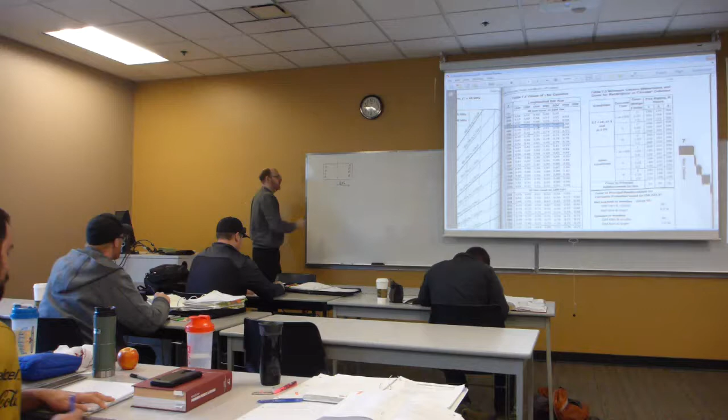We're just going to consider bars along here. The number of bars in this particular pattern does not matter. Now, what we've got here is that gamma h is the distance between bars, so from the neutral axis it's half gamma h.

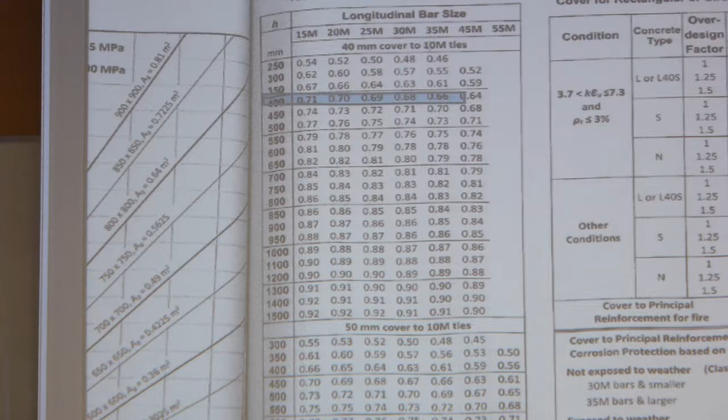This gamma value, we don't need to calculate. We actually have this table here, table 7.2, which allows us to figure out for a particular size column and a particular bar size what that value for gamma is. This takes into account the cover distance and the stirrups and automatically figures out what gamma is. The first one here is 40 millimeter cover with 10M ties, and then we also have 50 millimeter cover to 10M ties, tabled down here as well. So it's just a matter of looking up on the table what that value for gamma is for your particular configuration.

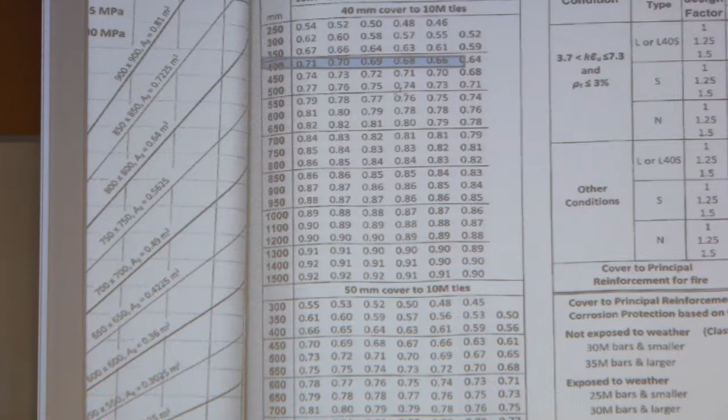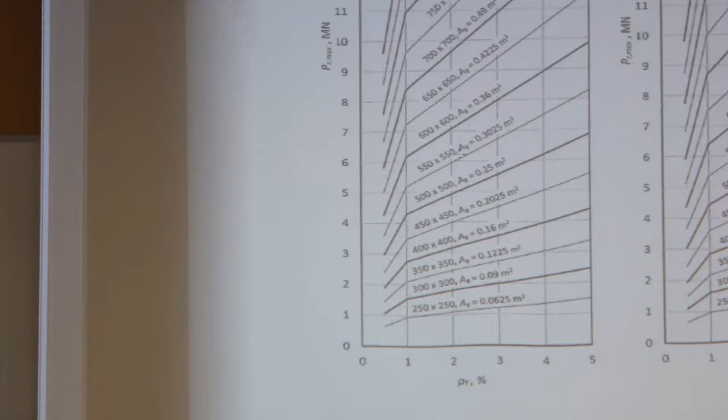So again, we start by coming up with our PF and setting that equal to PR, going back to this table and reading across and coming up with our first guess of our size. That first guess of that size, we can then go back down to this table and figure out what gamma is. We're going to guess what size reinforcing we're going to use, so I just pull gamma off of the table, and then we do all of our calculations based off of that.

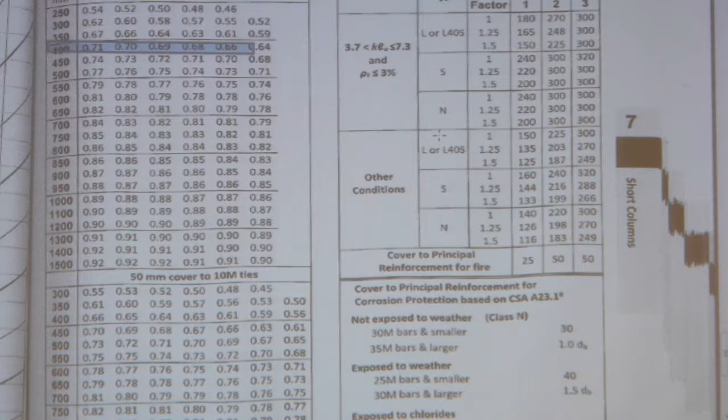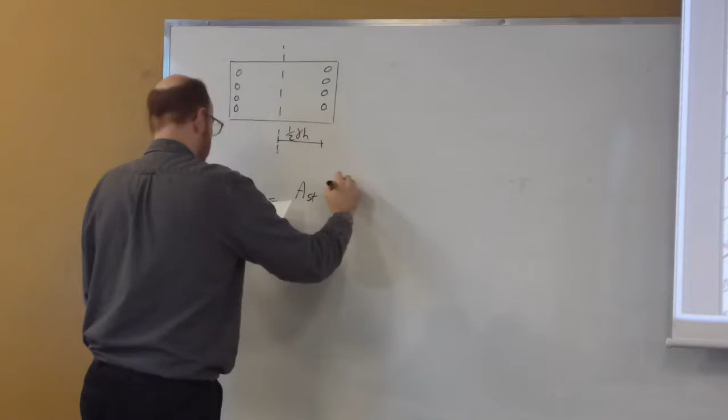So what we're going to do here is figure out the moment of inertia of the steel, and this is just going to be A times D squared. So on that one, H is 400? Yeah, so the tables are all done in terms of the generic value for H. So our I of our steel is A times D squared, so it's our area of our steel times gamma squared, H squared over 4 - that's our area times distance squared.

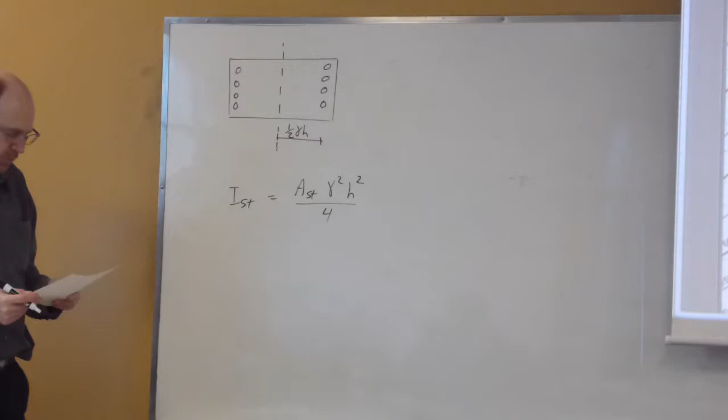Now, we don't necessarily know what size bars or how many bars we're putting in when we look at this formula. So what I'm going to do is relate this back to that reinforcing ratio, the rho value. So rho T is area of steel divided by BH. We looked at BD when we were talking about beams, but here we're looking at gross area for our columns - but again, it's just a reinforcing ratio. So if I plug that reinforcing ratio back in here, what we end up getting is rho T gamma squared BH cubed over 4.

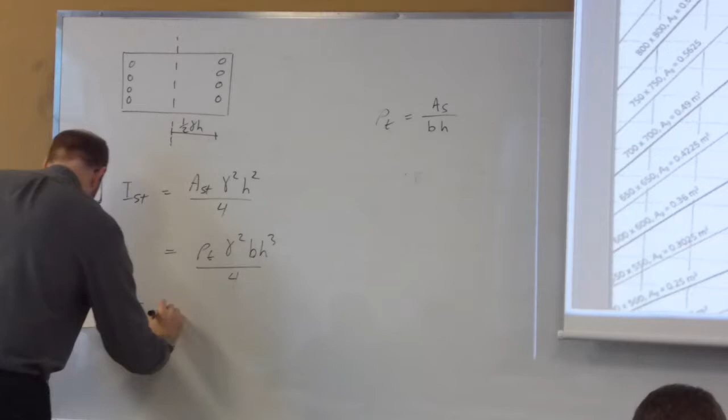And if I take this expression and substitute that back into our EI formula, I get 0.2 EC IG plus ES rho T gamma squared BH cubed over 4, all divided by 1 plus beta D.

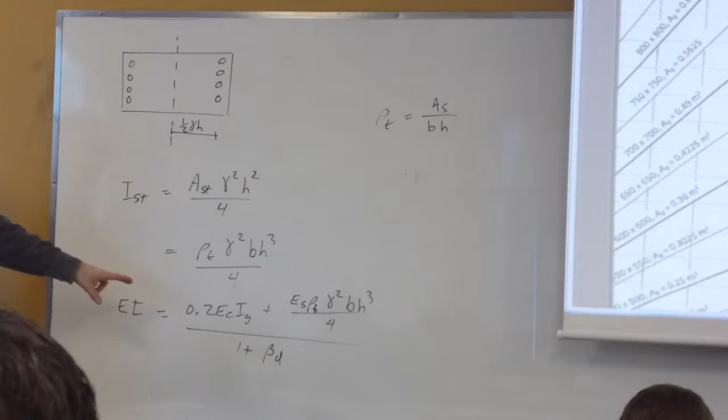Now, this formula - where does the 4 come from? Because it's 1/2 squared. Okay, so this formula is fairly complex, but you'll notice that I've got a BH cubed term out here, and IG, of course, is 1/12 BH cubed.

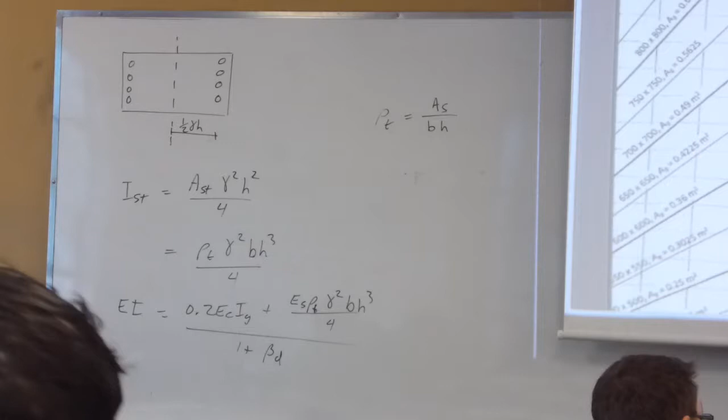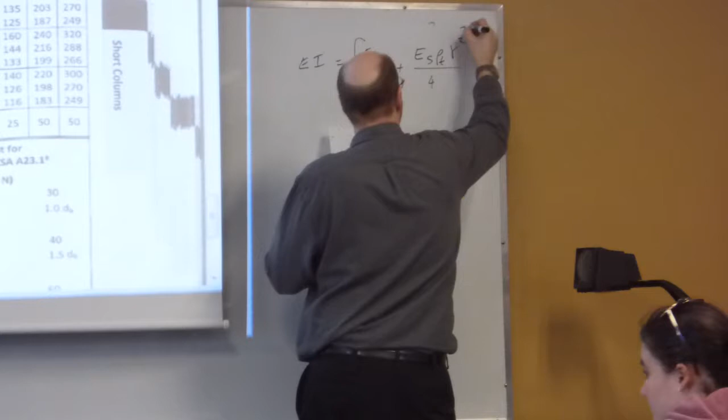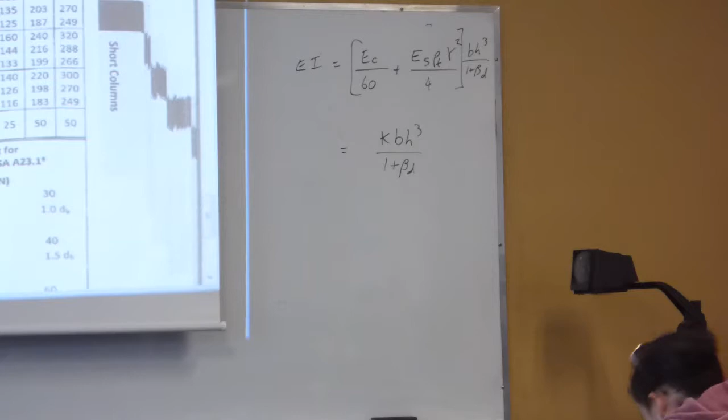So what we're going to do is rearrange that equation a little bit, and I'm going to factor out a part of it. So our EI is EC over 60 plus ES rho T gamma squared over 4, and this will be times BH cubed over 1 plus beta D. What we're going to do is take everything inside the square brackets and let it equal K, so this is equal to K times BH cubed over 1 plus beta D - all of this inside the square bracket.

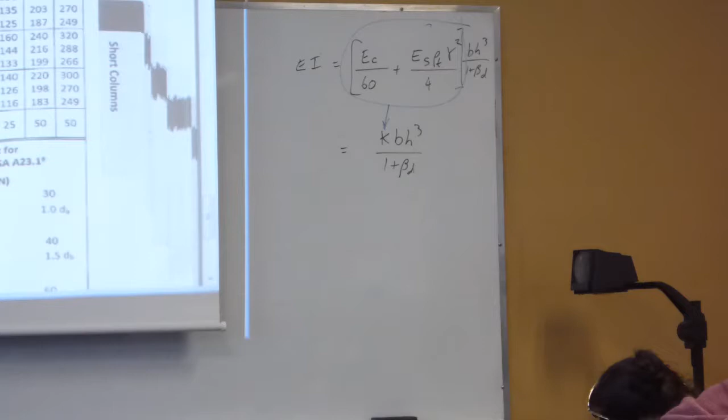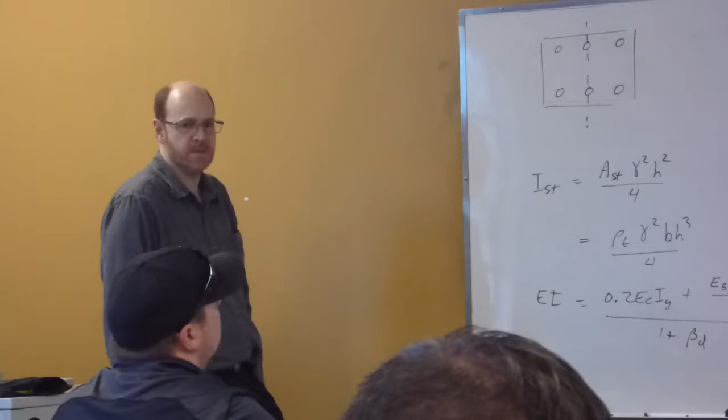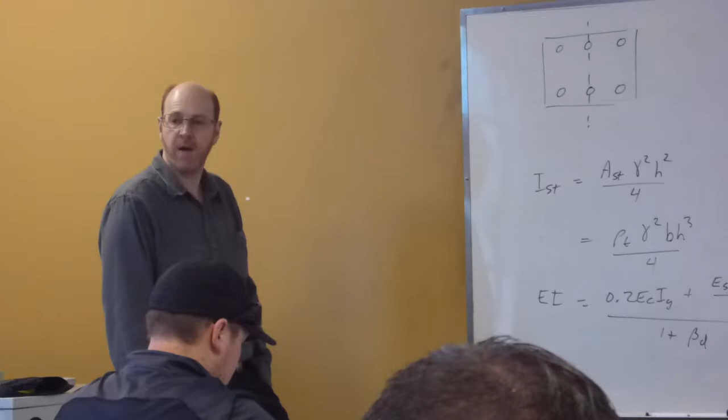Now let's go and take a look at bars on the side faces. That last calculation was bars on the end faces, and with bars on the end faces, it really didn't matter how many bars we were looking at, whether it was 5 per side or 6 per side or 2 per side. It really doesn't matter because it was just A times D squared, and we considered this area of steel term would be worked into our rho. So the number of bars weren't really critical - we did the calculation exactly the same.

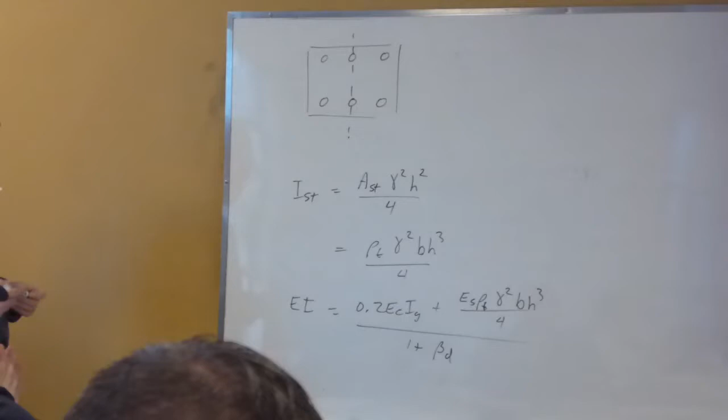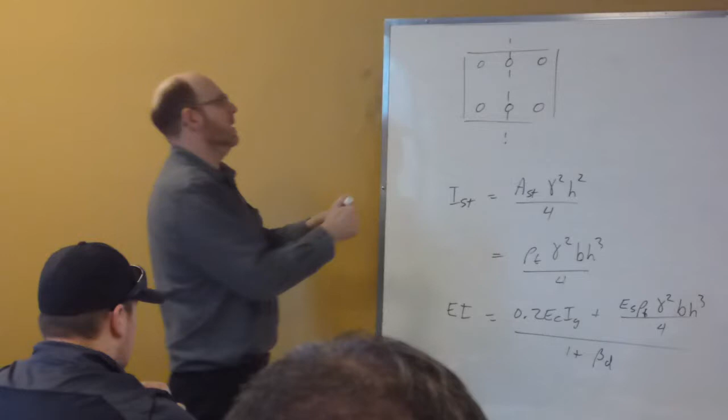When we're looking at bars on our side faces now, when I plug in our A times D squared, again we're going to neglect the moment of inertia for each individual bar. These bars out here, I'm going to do exactly the same calculation as we did before, so 2/3 of the bars are going to be effective at coming up with that moment of inertia. But these two bars right here lie right on the neutral axis, so when I plug in A times D squared, the distance term for those is 0. In other words, this is not as effective as putting in just 2 bars on each side without the additional bars along the side faces.

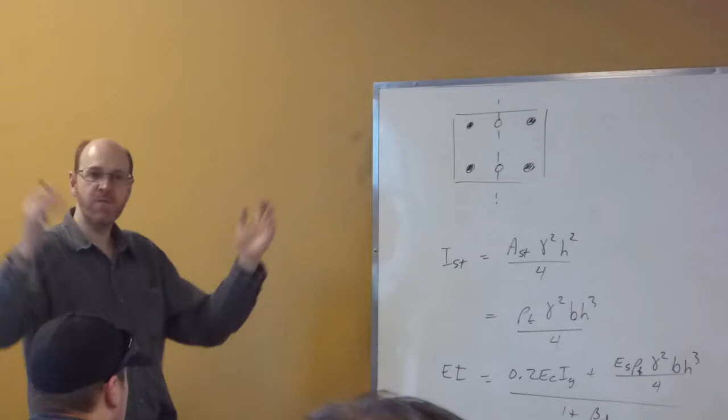So what may seem kind of counterintuitive is that the I of the steel goes down the more bars you put in when they're on the side faces, because more of that steel is closer to the middle where it's less effective. In this case here, what we would end up putting for our I steel is 2/3 times AST gamma squared H squared over 4, plus 1/3 times 0.

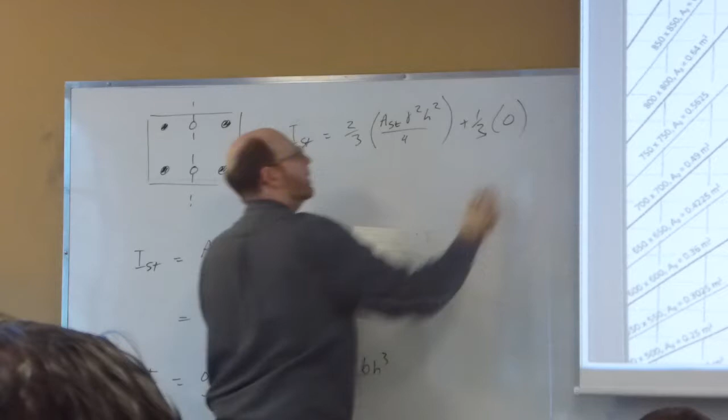Right? This part here is exactly the same as what we did there. 2/3 of it is effective, but 1/3 isn't. So when we calculate this out, what I end up with is a rho T gamma squared BH cubed over 6.

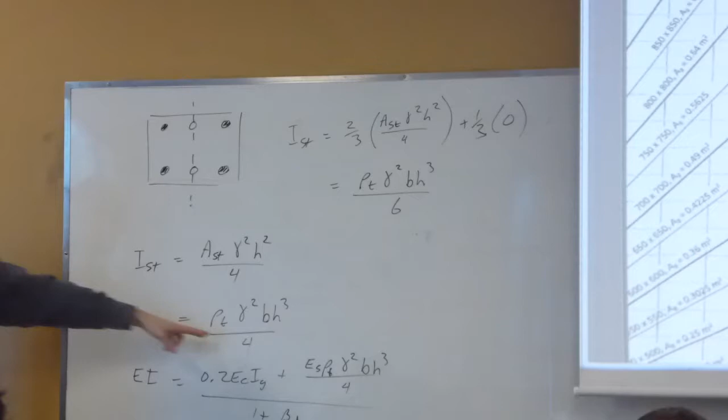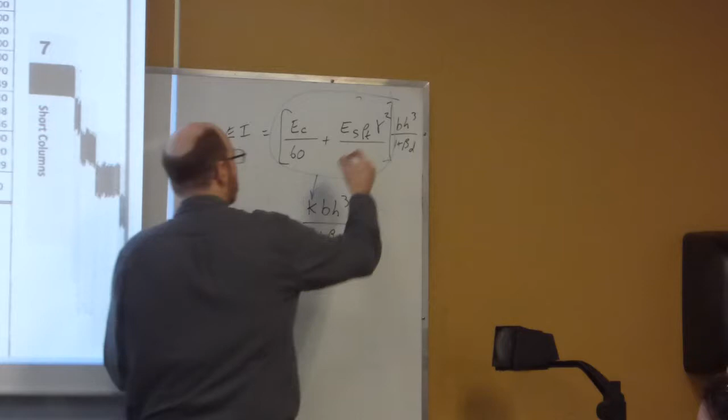Right? So instead of over 4, it's now over 6. And what you'll see is that for different patterns of reinforcing, the number that changes is this one right here. And that only affects our K value. So the rest here, we end up in the BH cubed over 1 plus beta D. That's all exactly the same. K changes.

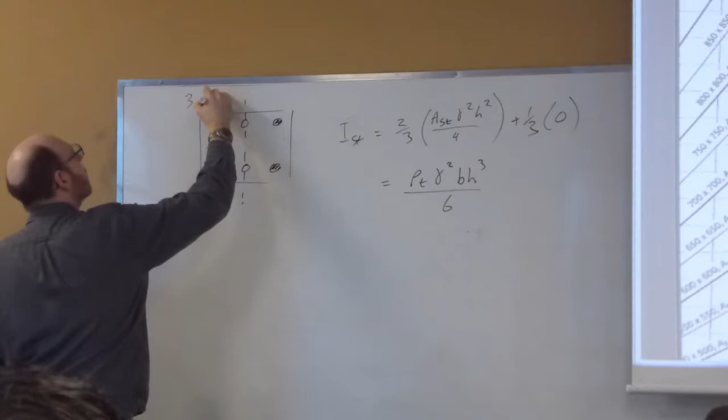Right? So this was 3 bars. If I do the same thing with 5 bars, right, so we look at a configuration like this.

All right, I get our I of steel is 2/5 times our AST gamma squared H squared over 4, plus 2/5, it'll be AST gamma squared H squared over 16.

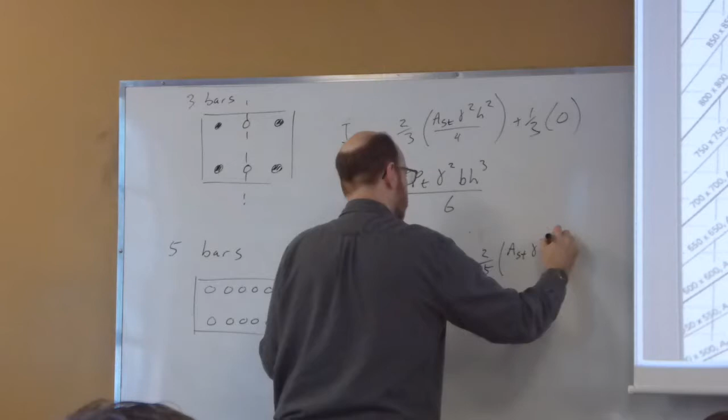Right, so these 2 bars right here have a different distance term. That's where the 16 comes from. And this will calculate out to rho t gamma squared BH cubed over 8. And so more bars, bigger denominator, Ist is going down.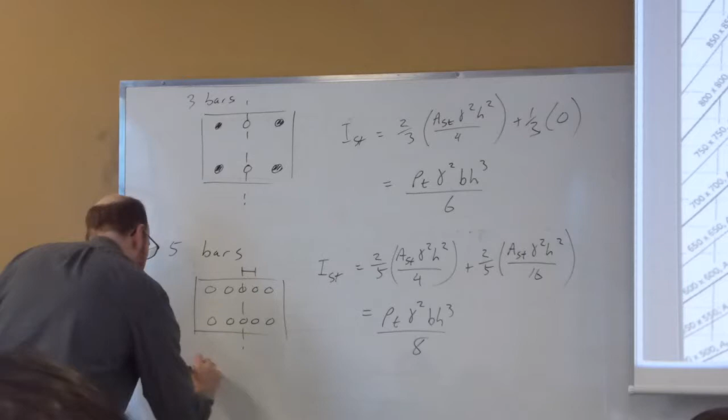For 7 bars, it's over 9.

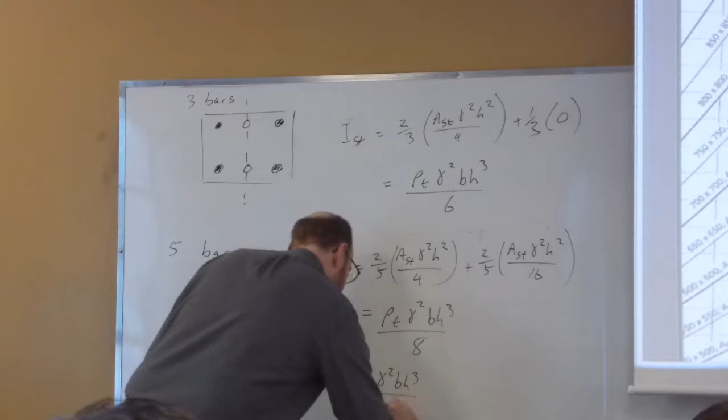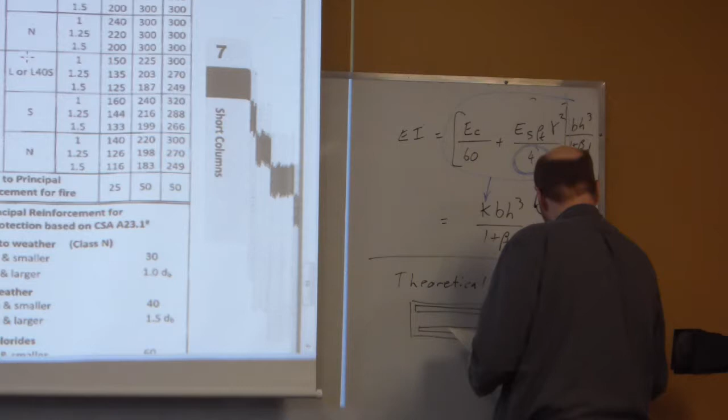Your theoretical limit. So a theoretical limit assumes we have a solid block of steel in there. The denominator becomes 12 for that theoretical limit.

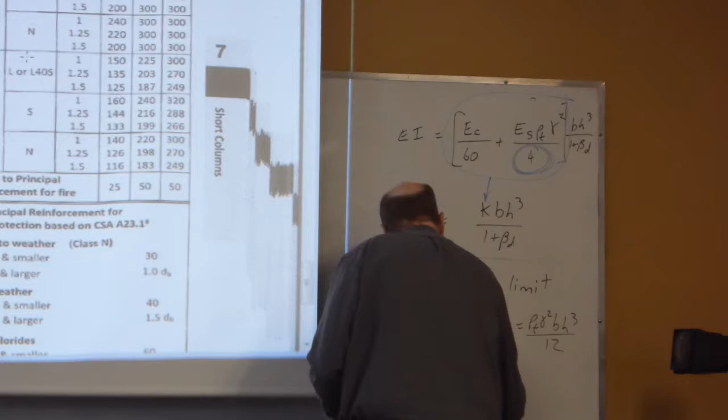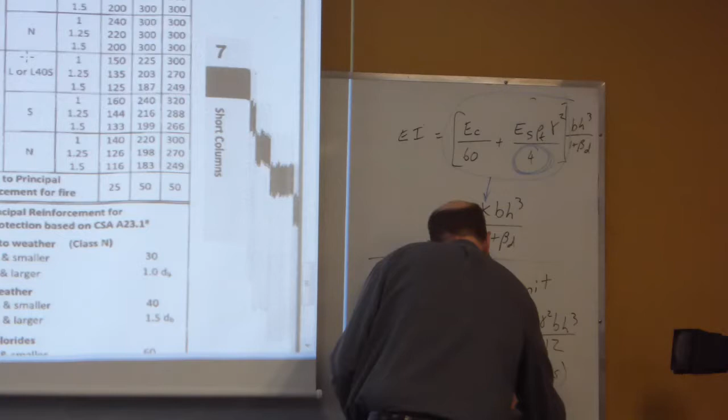If you go with a practical limit of 6 bars, that number works out to 8.57.

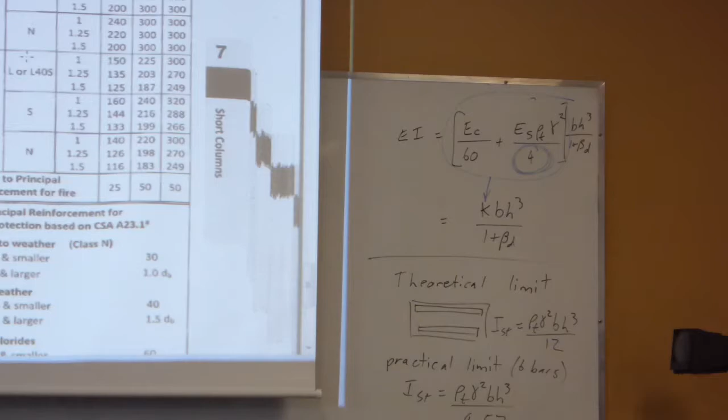And the last one that we'll look at is equal reinforcing on all 4 sides, which is a combination of these last 2. Right, so remember, the first one we looked at was bars on the end faces. That was divided by 4. And we looked at bars on the side faces, and here, different pattern. Right? The more bars we get, the less effective the steel is in terms of resisting the bending.

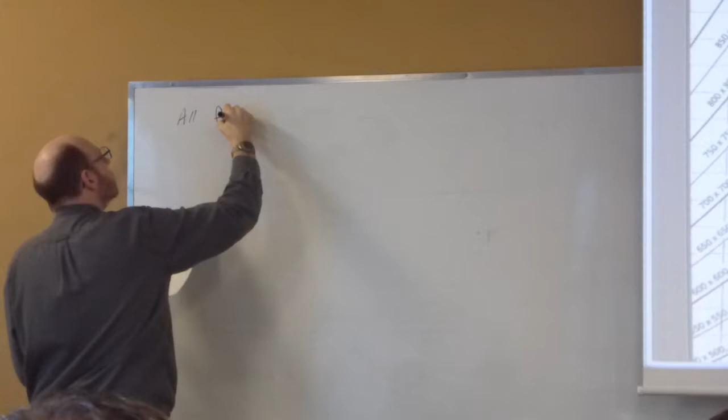So let's go with all four sides. And we'll go with 6 bars per side. And the denominator becomes 5.88 in that configuration.

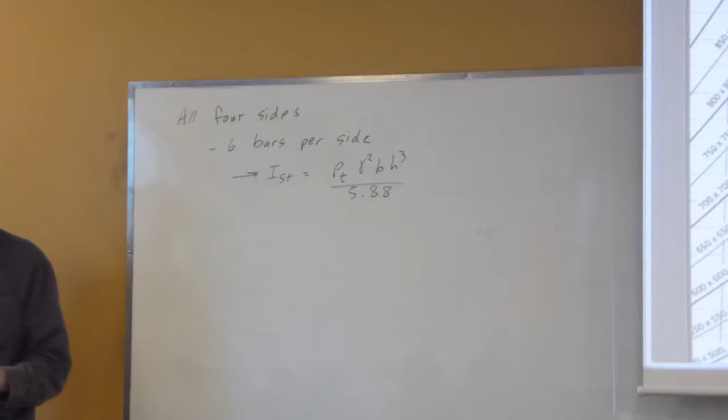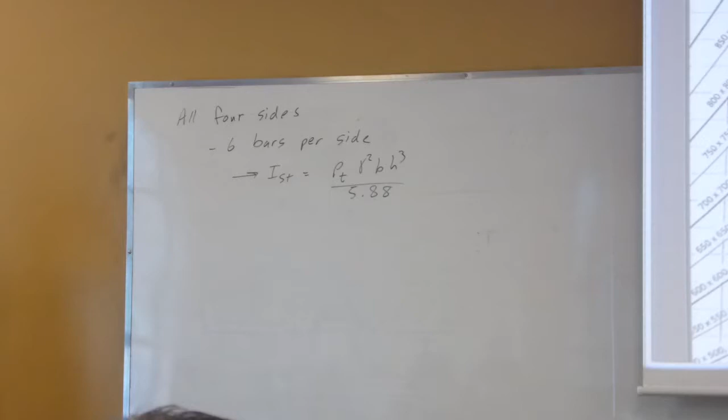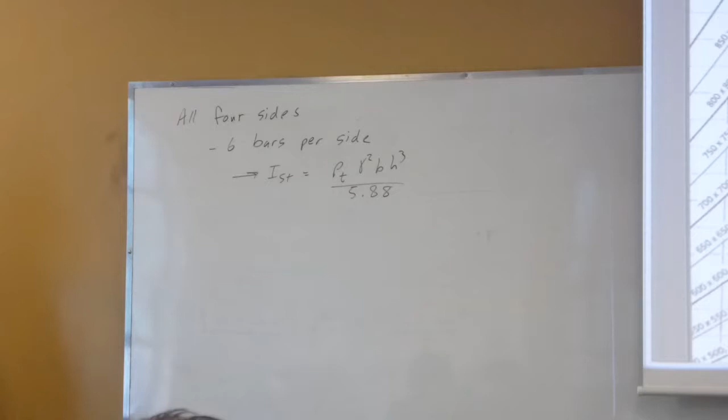Now, it's not really all that necessary to go through and do extensive set of calculations for this, because what we're looking at is a set of interaction curves where we're going to be pulling off the behavior of our column. Right? Now, these interaction curves, this used to be the single largest section of the concrete design handbook. There's pages and pages and pages of interaction curves. Right? So there's so many of them that now they've decided that they're going to put them as a separate download. Right? So this is that Chapter 7 additional design aids.

Right? And these are what your interaction curves look like. And there are pages and pages and pages of them. So for different configurations. Right, so just let's go and look at the first one here for a minute.

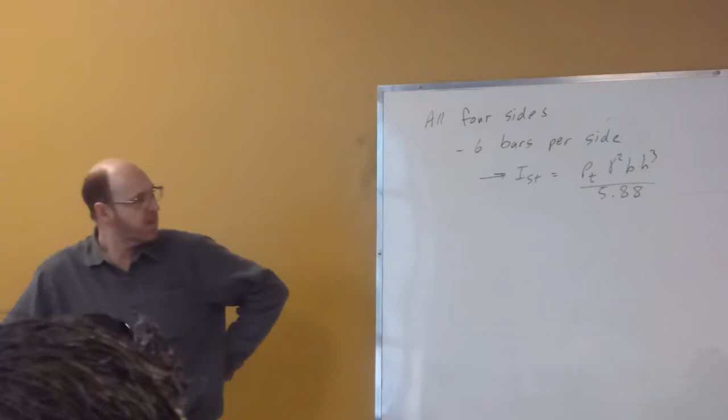Right, so what this interaction curve does, and the way it works is fairly straightforward, is we're going to have a curve that matches our particular column. Right, this particular one is based off of an F prime C of 25 MPa and a gamma value of 0.6. Right, so what we're going to do is first of all identify for our particular column size that we're looking at what is F prime C and what is gamma. Right, so we're going to have like 35 MPa and a gamma of 0.7.

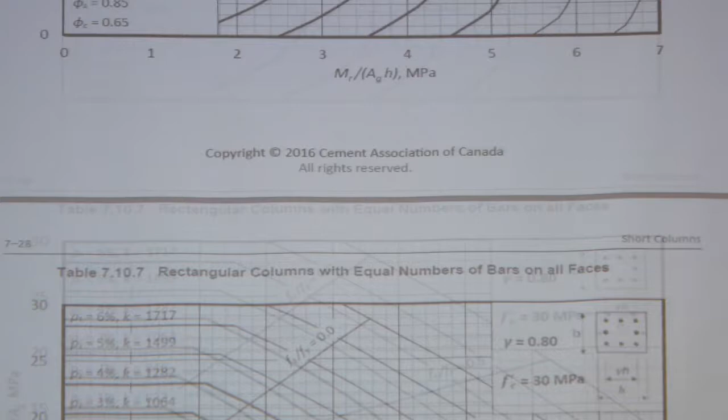Right, so I'm going to find here 35 MPa, there's a gamma of 0.7. Right, so it's just a matter of hunting down to find the right page.

Yes? Where can I find these in this book? They're not in the book.

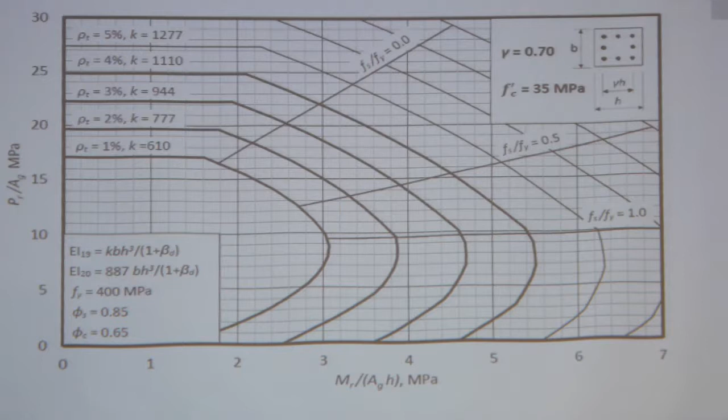They're separate download. Right, so if you go to the website where you had the link to find the book, there'll be a separate download link for the PDF right there. Will we need those? Yes. Yeah, so when you're looking at doing these calculations, these become critical.

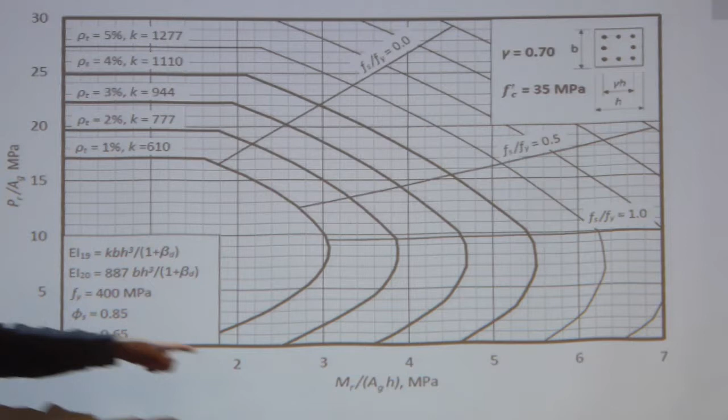So what we have is the vertical axis is our axial resistance, and our horizontal axis is our moment resistance. Right. So again, they're set for PR and MR. So basically, what we're going to do is set that equal to PF, and we're going to set that equal to MF. Now, our MF is either going to be M2 or MC, depending upon whether we've got a slender or non-slender column.

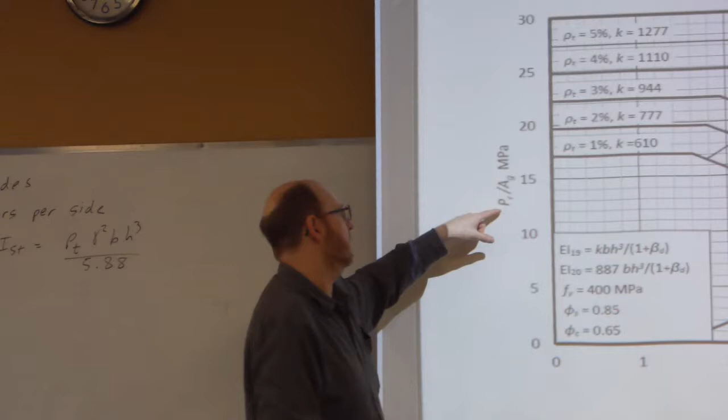Right. So it's just a matter of calculating this value. PF over AG. Right, so again, we've got an AG value for our column size that was listed. So it's just a matter of pulling off a value and coming up with a value in here and drawing off a horizontal line.

I'm going to do the same thing with my Mf over AGH, come up with a value, and draw a line. Where those two lines intersect, I've got a point. That point is either inside of this curve or outside the curve. If it's inside, it works. If it's outside, it doesn't. It's basically as simple as that.

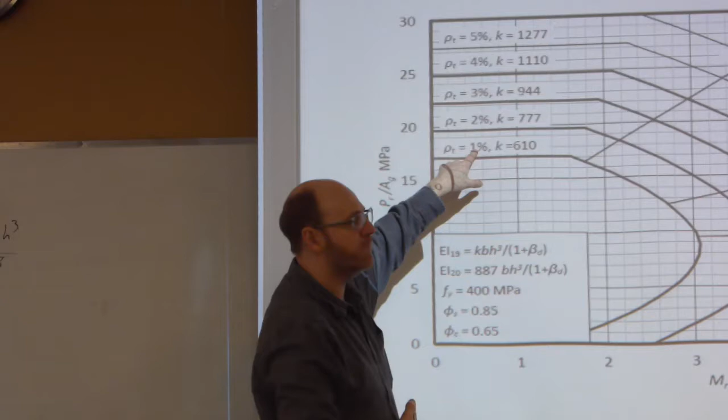Now what we have here are a variety of different curves based on different reinforcing ratios - 1%, 2%, 3%, 4%, and so on. So for whatever reinforcing pattern I've got, if I go back to some particular configuration, we're going back to these ones right here, and look at, say, a 400 by 400 column. That's 2 faces - let's go with 4 faces here, and the 400 by 400 column.

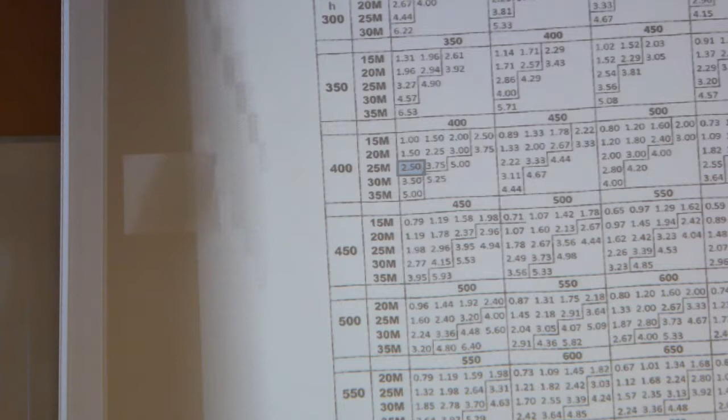So I'm looking in this configuration right here, and I say, okay, let's choose a pattern where I've got 2.5% reinforcing. So now I'm going to go to my table and say, okay, I need something halfway between the 2% and the 3%. So I'm going to interpolate the curve halfway in the middle here. So I have that new interpolated curve - that's the one for our column.

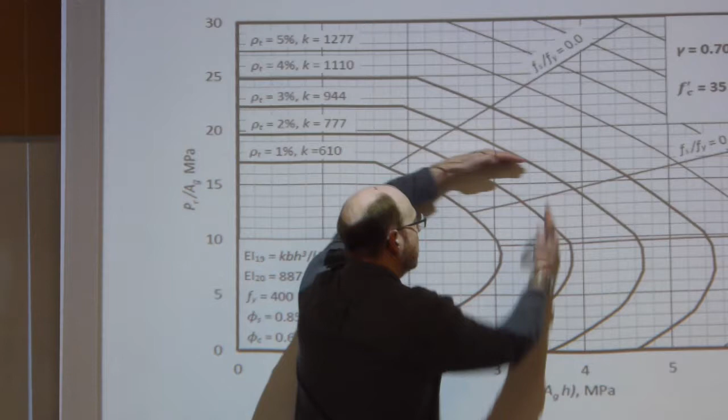So now I'm going to calculate this quantity, and I'm going to see if that point is inside or outside that interpolated curve. Inside it works, outside it doesn't.

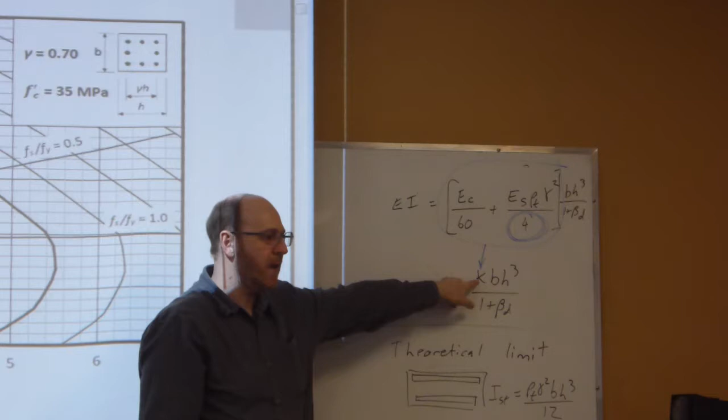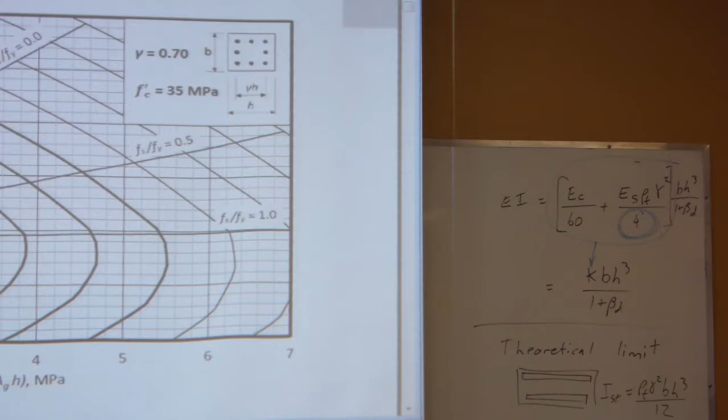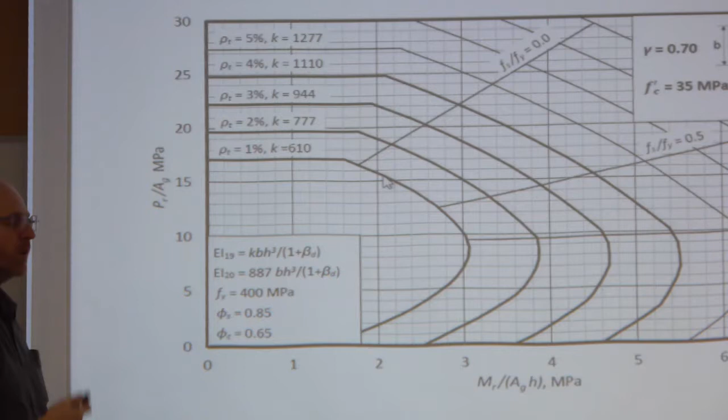Now you'll notice that in addition to reinforcing ratios, there's a K value listed. This K value is this one right here. So if we are doing a slender column and we have to take into account our buckling or the P-delta effects, and we need the EI for the P-delta, I'm going to calculate the EI based off of that K. So I'm just going to pull off the K value right here. Again, if I'm interpolating a curve at 2.5%, I will interpolate K in between those two values. Once I get that K value, I just stick it in the formula. I've got my EI, that goes into my PC formula, and then continue on.

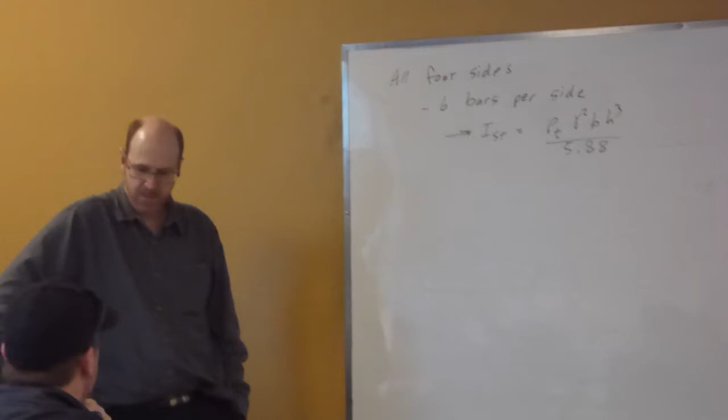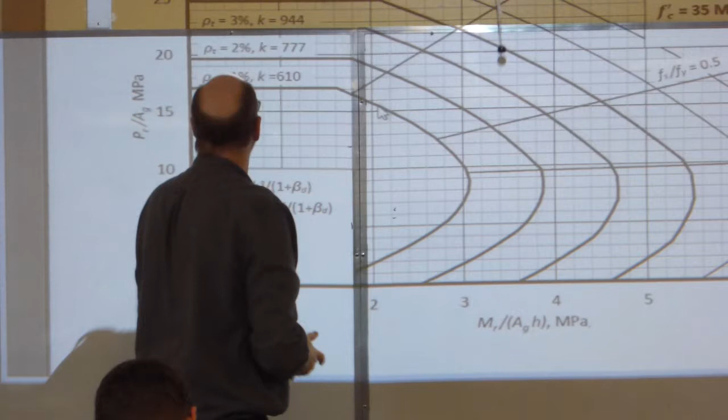Yes? Our gamma is - that's a good question. Let's move the head out of the way here. What I'm going to do is look at our 2% curve here. So there's our 2% curve - not bad. This is a gamma of 0.7. So what I'm going to do is go up to a gamma of 0.75, and let's see if we can line these up properly.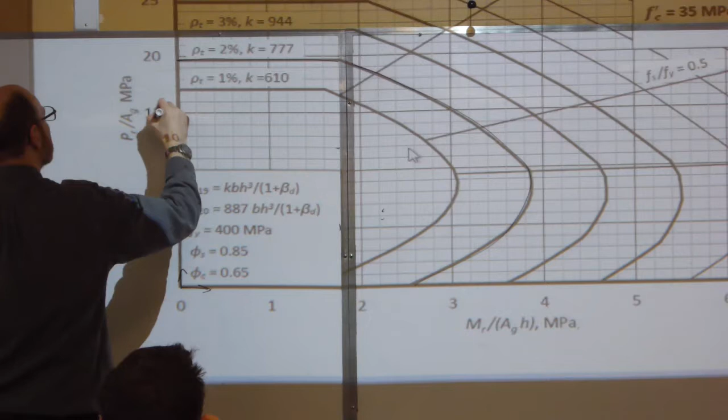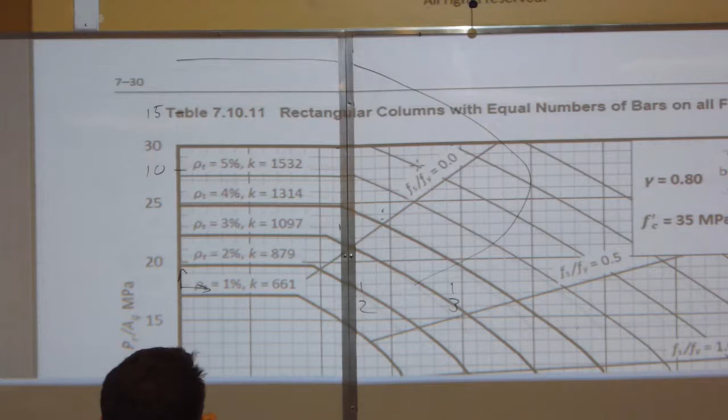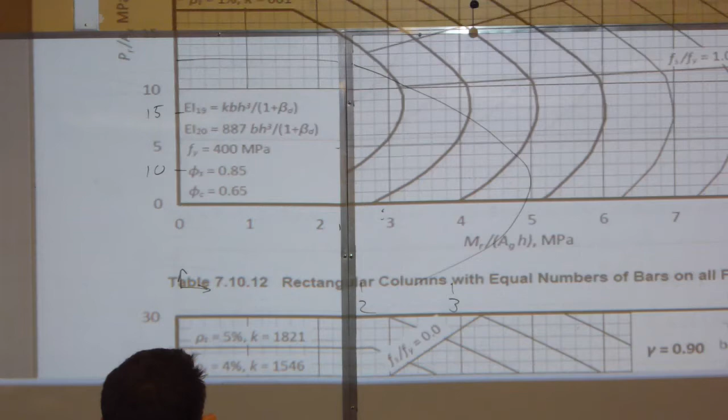So it's going to be 10, 15. And this here is 2, 3. See how they line up. So I'm going to go up to a gamma here of 0.8. And you can see that they don't quite line up perfectly, but it's not going to let me line it up exactly, but okay.

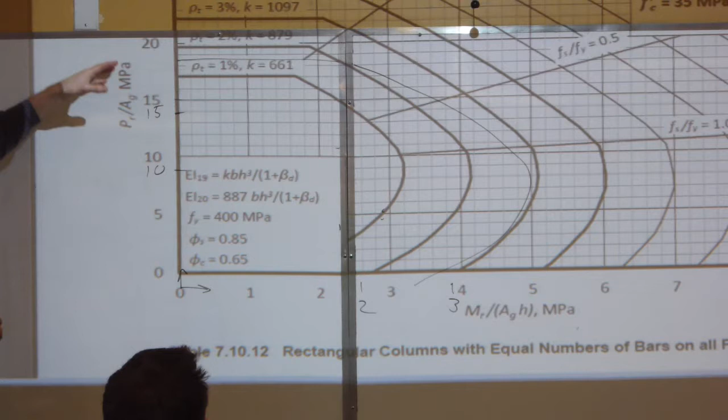So what we're seeing here is that this was our 2% curve, right? And this part here, the difference between our 15 and 15 is about the same as what we have here, so this part of the curve is lining up exactly the same. There's no real movement out here. But with our 2% curve coming down here, the nose of this - again here this is our 3 - if I take this section right here and move this out, what happens is this nose of the curve is actually moved out a little bit.

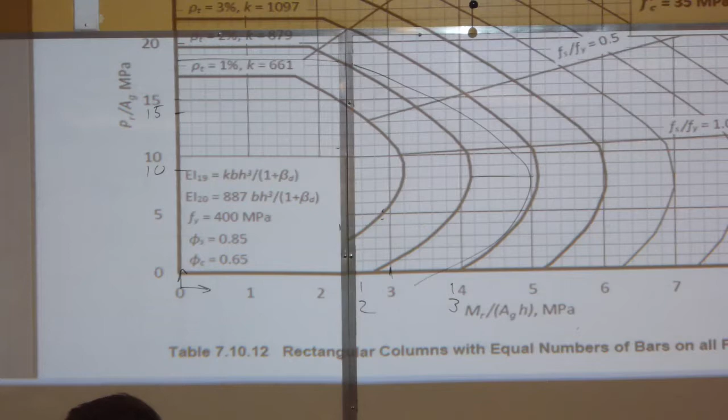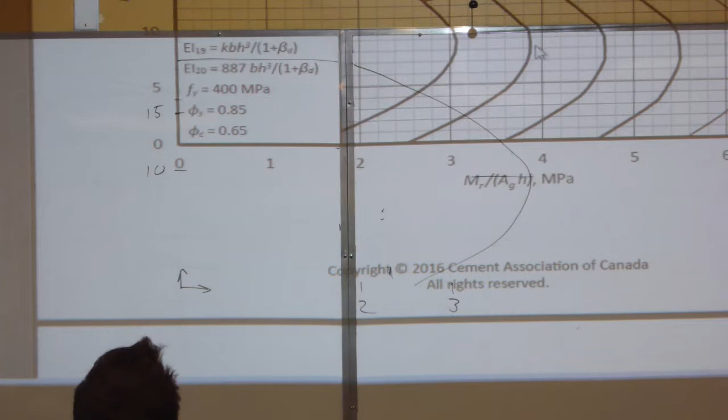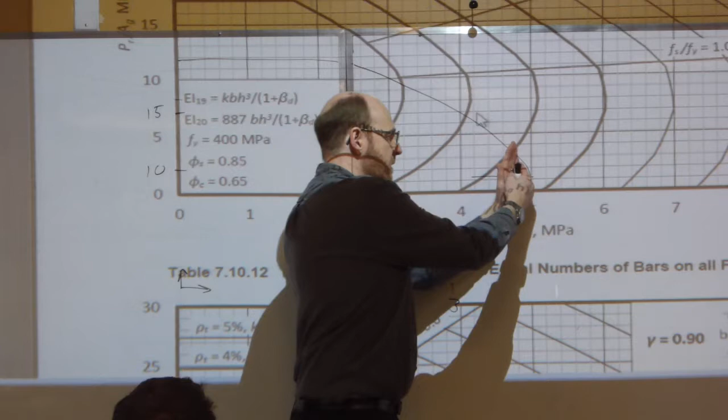So what you're seeing is, I'm going to look at where the nose of that 2% is. The nose of the 2% was coming out here at a value of about 3.8. And as I go up here to 0.8 for the 2% curve, the nose goes up to 4.2. So here it was 3.8, and here it is 4.2. So the higher value of gamma, the more this curve is being pushed out that way.

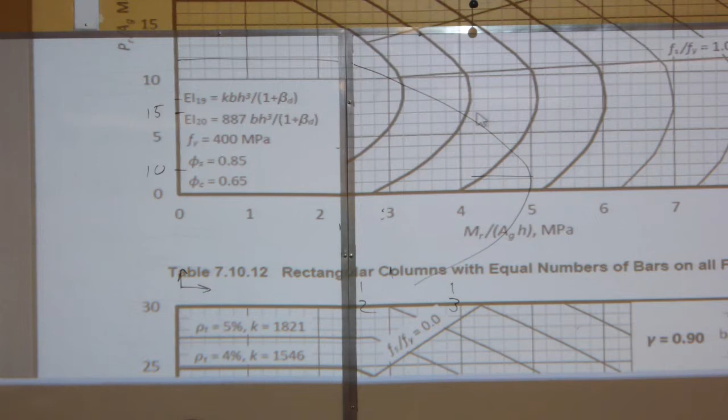Which means that what we get is a higher moment resistance. So that means it is conservative to round down your gamma. If you round down your gamma, that means the nose of that curve is pulled back, and so you are not getting as much moment resistance as you would have. So it is conservative to round down.

Okay, let's go and take a look at some examples here.

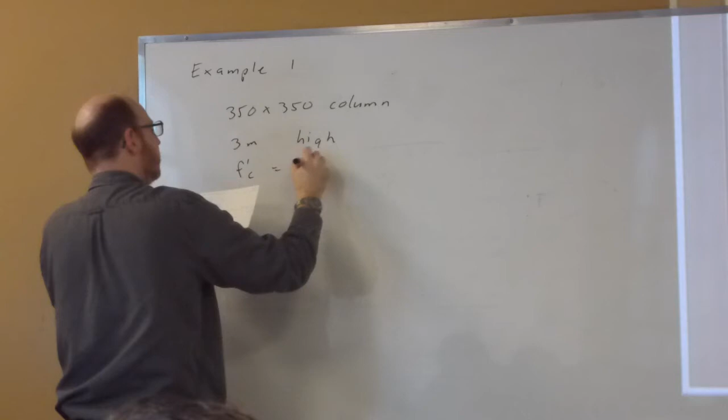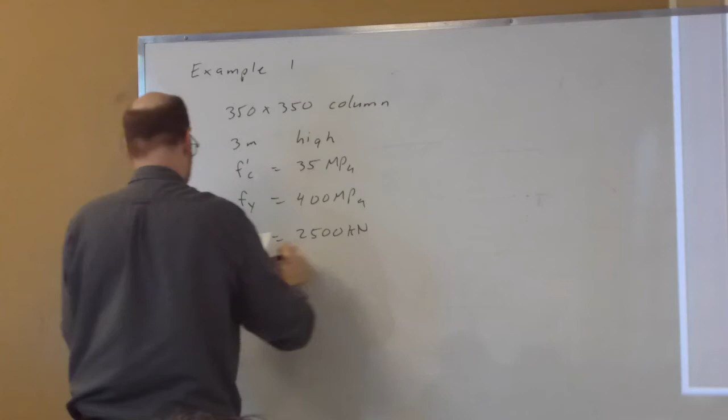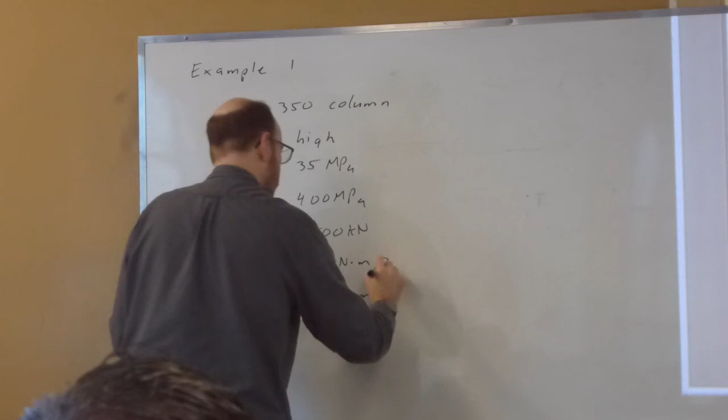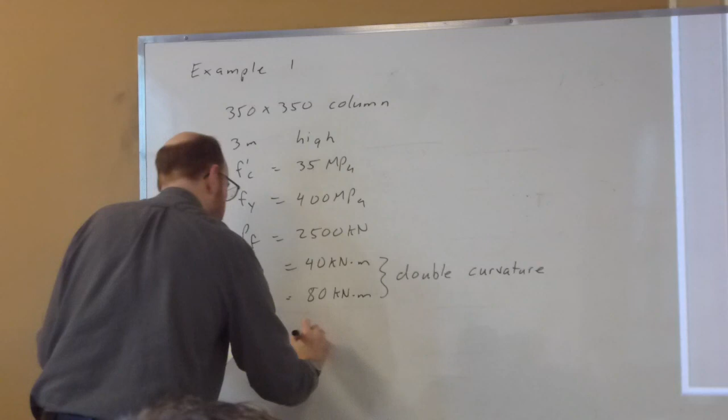We'll go with a 350 by 350 column, 3-meter high. F'c of 35 MPa, and Fy of 400 MPa. Our Pf is 2,500 kilonewtons. M1 and M2 are going to be 40 kilonewton meters and 80 kilonewton meters. Say this is in double curvature. And we're going to use 40 millimeter cover to 10M ties.